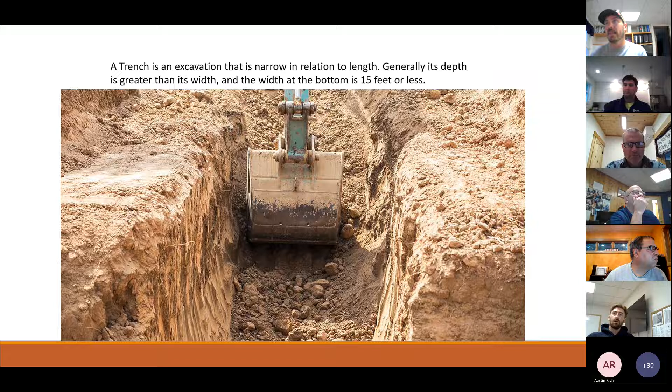Trenches 5 feet or deeper require some sort of system to protect you, whether it's sloping, benching, shoring, or shielding. Sloping is when you slope back the edges of the trench. A good rule is for every foot deep you go, 1.5 feet back. In benching, use the 1-to-1 system, and one bench cannot be higher or longer than 4 feet.

Shoring would be putting plates in and securing them with some sort of jack system or tensioning system that holds those plates against the walls. And shielding would be like a trench box, stuff like that.

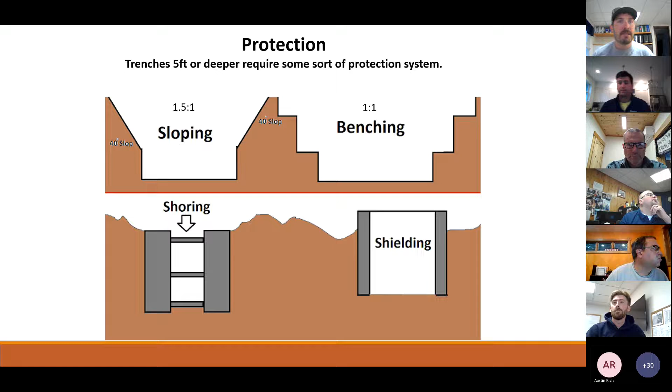You're required to do daily inspections conducted by a competent person, and this person should be able to identify the soil, inspect any protective systems that are in place, design any structural ramps, monitor water removal equipment, and conduct inspections around the site.

You do inspections after a rainstorm, or after freezing and thawing has occurred. So overnight in the spring and fall, if it froze and it's thawing out in the morning, you've got to make sure you inspect that, or when any other conditions arise that you deem necessary to inspect it.

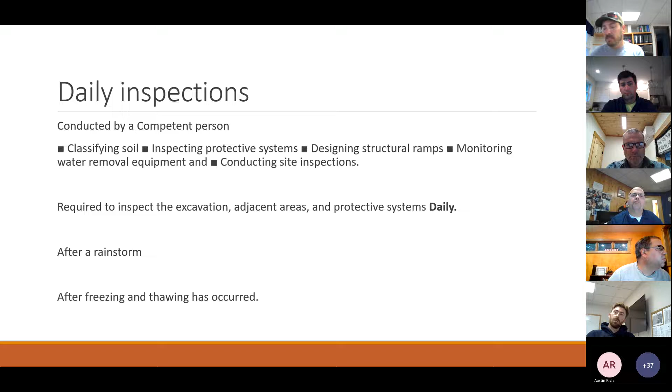What to inspect - again, the soil conditions, any fissures or cracks, and your spoil piles need to be 2 feet from the edge. Make sure any tools or equipment are no closer than 2 feet.

Inspect your protective systems to make sure nothing got messed with overnight. Make sure they're all in good working order. Also check for hazardous atmospheres, because a trench seems like a pretty open area, but lots of gases are heavier than air and can settle in the lowest parts of wherever they traveled to.

You have to have safe means of egress, a ladder within 25 feet of where you're working in the trench. You've got to have a ladder, stairs, steps, or ramps, something other than just a sloped bank out of the trench, because you could roll your ankle or get hurt trying to get out quickly.

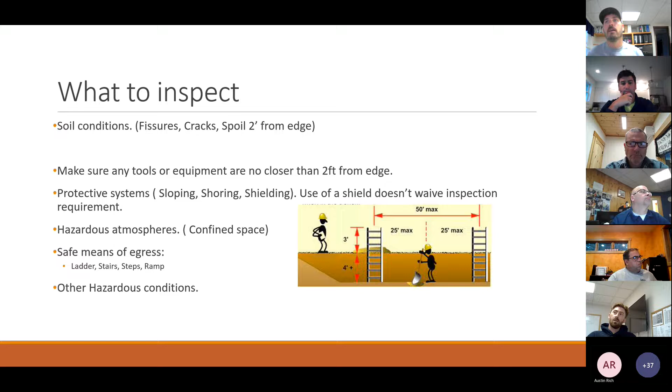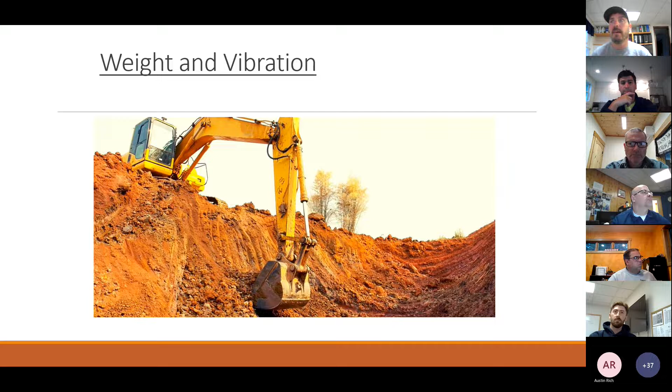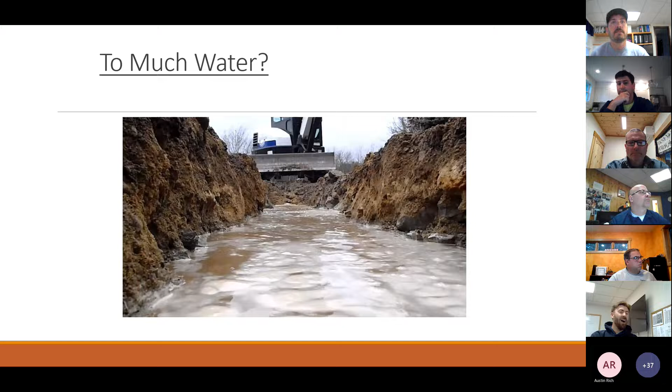Again, be aware of any weight or vibrations on the edge of the trench. They can weaken walls. Too much water in there is a problem, water and trenches and dirt really don't mix well. Water can destabilize the trench quickly. With that weight and all that, be aware of fissuring or bulging of the walls. Any cracks or bulges you see means the trench is becoming unstable and dangerous to work in. So be aware of that. That's all I really have.

So Ken, you're up, or Ethan? Yeah, I'll start. Well, thanks, Austin.

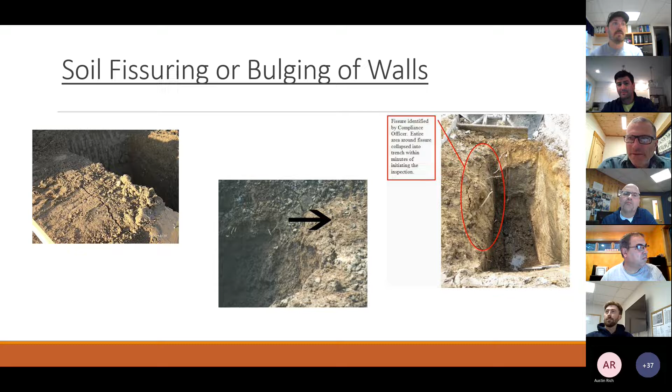I always look for ladders or egress too, and I think that's an important thing that can get overlooked. If an OSHA inspector comes and sees a slope, they might think it's okay, but there's a lot of thinking involved for them to prove it's not compliant. Where if they take a picture and there's no ladder, it's an automatic violation without much effort. So don't let them get you on the easy stuff, is my point.

Trench is a big emphasis program right now, and they are issuing a lot of tickets and stopping to visit a lot of sites. So we've got a lot of open holes out there. Let's make sure that if you have any questions on a trench excavation, you let us know. Let us help you make sure we're in compliance.

I have one thing, Ken, where that photo on the right shows the fissure. We had a guy, a long time ago, who got hurt really bad, and it was only a 3-foot deep trench. You know how we're always trained that you need a trench box at a certain depth. It was up at the U-Mall, and it was heavy soil. It was only a 3-foot trench, and that was happening, the guys had noticed it, but he broke it. His leg got broken by the soil, the way his leg was positioned. So just because it's shallow doesn't mean it's not dangerous when it starts caving in.

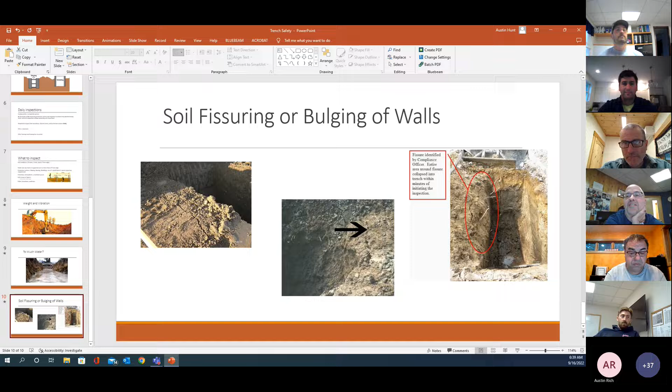It's a lot of weight. Yeah, be a lot of weight. Especially if you've got a boulder or something solid, it's going to stay together as it rolls at you. Yeah, and it goes quick. All right. Thanks. Okay, I'll take over the screen.

Scott Burns is remembering who I was talking about right now, I bet. It wasn't him, but he was here.

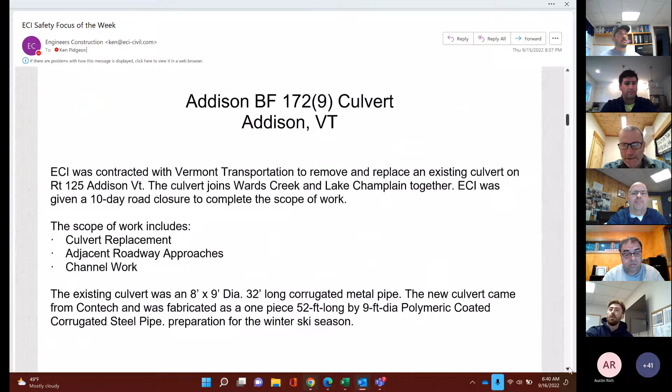This week's project of the week was the Addison BF 172(9) culvert replacement. ECI was contracted with Vermont Transportation to remove and replace an existing culvert on Route 125 in Addison. The culvert joins Wards Creek and Lake Champlain together. ECI was given a 10-day road closure to complete the scope of work, which included culvert replacement, adjacent roadway approaches, and channel work. The existing culvert was an 8-foot by 9-foot diameter, 32-foot long corrugated metal pipe, and the new culvert came from Contech and was fabricated as a one-piece, 52-foot long, 9-foot diameter, polymeric coated corrugated steel pipe.

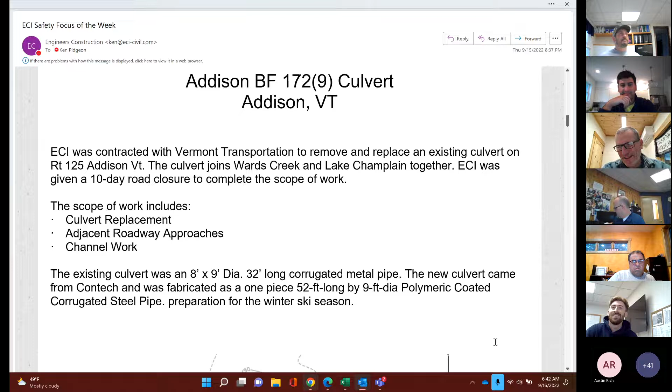I see I somehow got a typo in there, in preparation for the winter ski season. I had a lot of trouble last night pulling all this together, I've had a lot of trouble with Constant Contact, and I made changes that didn't show up here, so I apologize for that. But that's all right, everyone gets the point. I'll scroll down to the photos now.

This first photo shows some existing conditions. You can see Wards Creek flowing right into Lake Champlain.

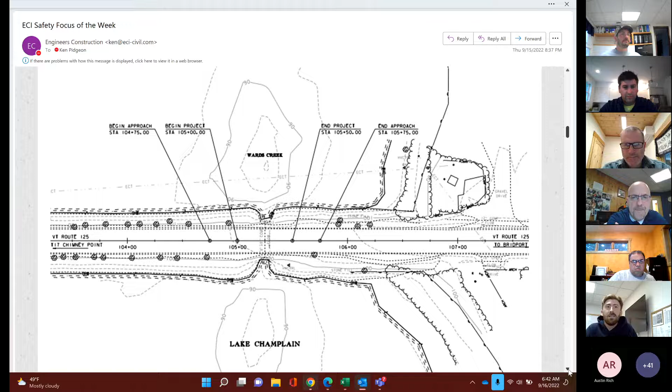Project width, we had 50 feet off center line to complete the work in. And I think that's it for this page.

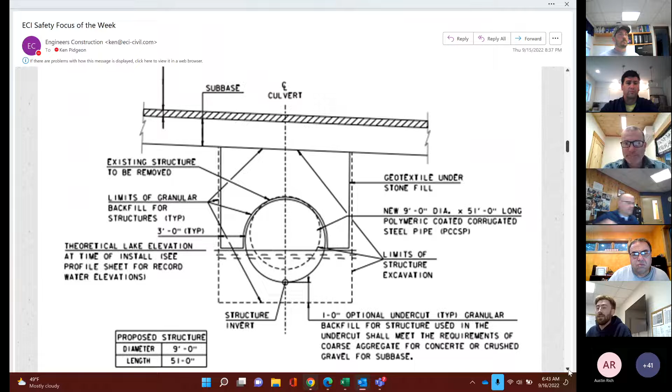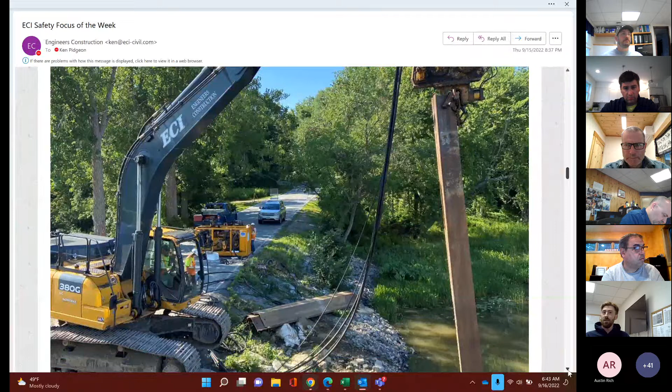The whole project was done with our John Deere 380. This photo shows us driving 25-foot sheets for a cofferdam. We used that on the inlet and outlet, and a 6-inch pump to dewater the project.

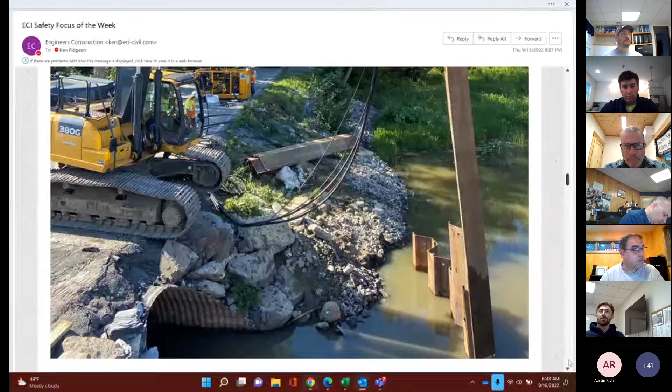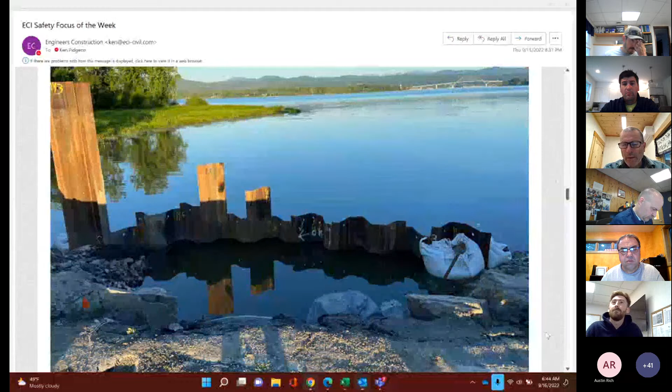That was a cool photo up in the bucket. A lot of mornings were pretty calm and nice there. You can see the bridge in the background, but this just shows the completed cofferdam. I forget the name of that bridge, but it had nice views. Neat bridge, yeah.

Right here you can see the existing conditions of the culvert. It's pretty corroded on the sides and definitely needed to be replaced. It's very similar to the Talcott Road culvert, how it broke down at that point.

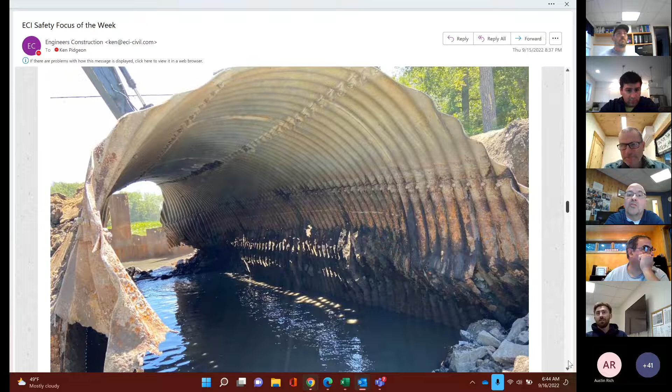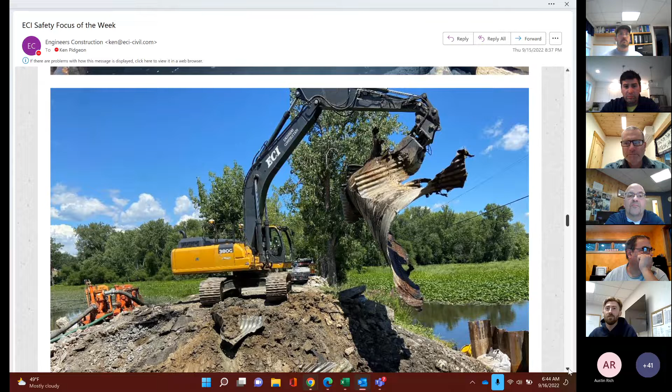Keep scrolling. The middle was all corroded out, so the top peeled off pretty easily, but the bottom was pretty sedimented in with like 3 feet of silt and rock. It definitely took some time digging that out and peeling it out. This is a photo of them peeling off at least the top of the culvert.

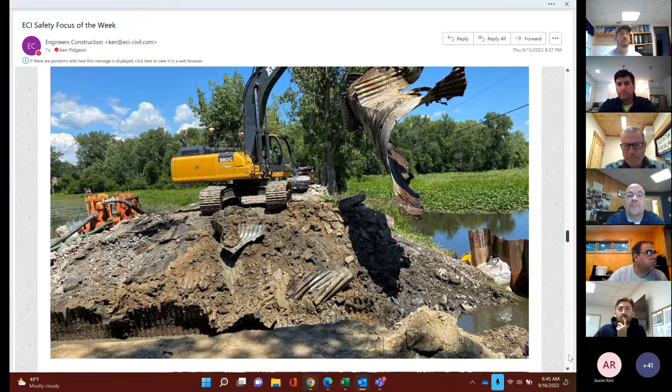This is the new culvert that went in, and we used the loader and excavator to walk it down the road from our staging area. It came as one piece - pretty cool, huh? It was actually Contech's biggest pipe they ever fabricated for one full piece of pipe, transported. So they stopped and saw it.

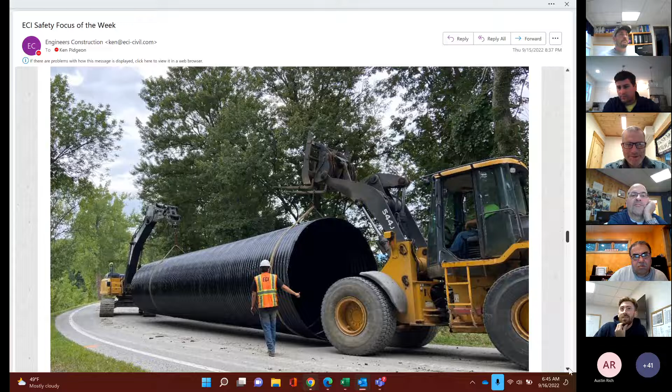They were excited too. It makes the installation a lot faster. Once they got it over, they re-rigged it and set it right into place. It went really smooth.

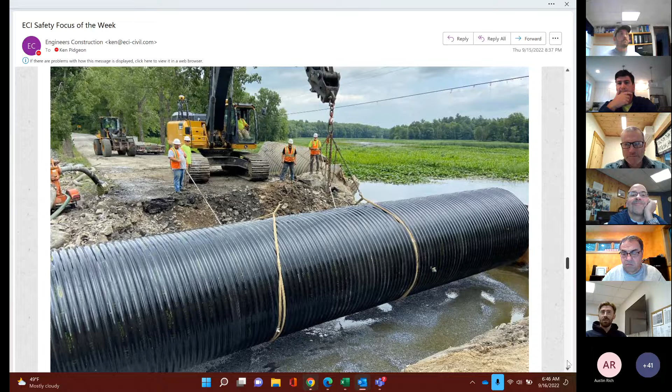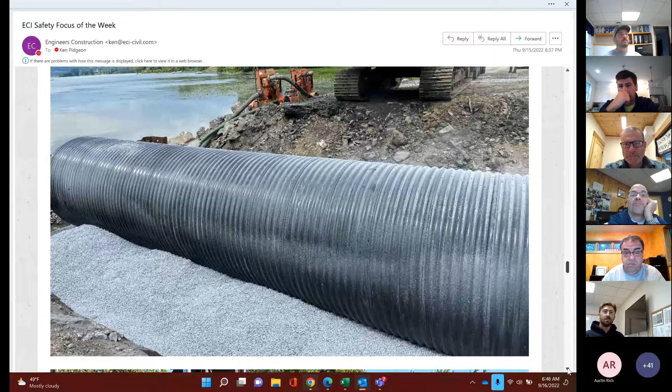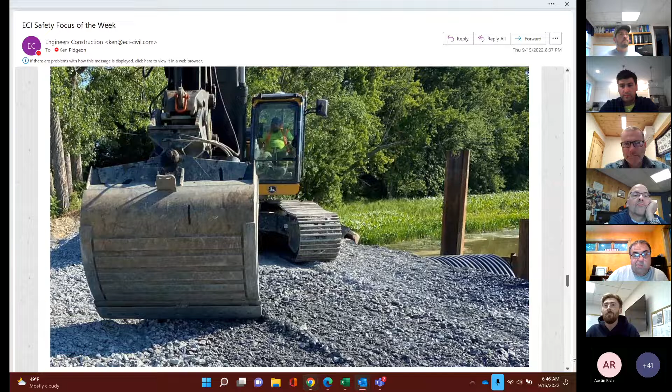Here's a photo of them backfilling, so you can see we're just up out of the water level, and I believe he's started backfilling the other side. That's the 3/4 inch stone. Finally, towards the end, there's Jerry grading off the dense graded crushed stone or crushed gravel for the subgrade. And yeah, we hit our 10-day closure - we used just about all of it.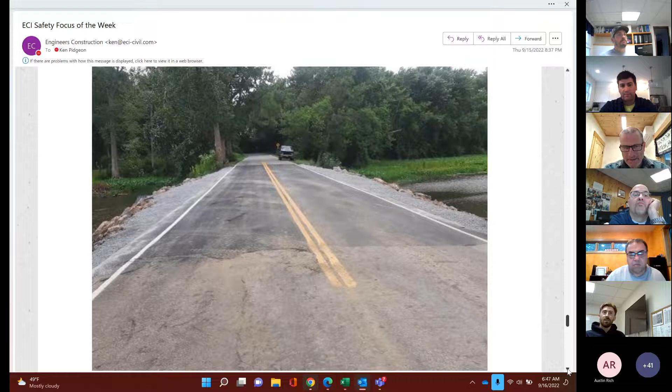This is from the photo archives, the Carey Bay Route 2 culvert replacement in North Hero back in 2012. Obviously it's quite a similar job, tying in two bodies of water, but it's a lake on each side in this case. The other unique thing about Carey Bay is Route 2 here is the only connection across the county - there's no back roads around because it is truly a causeway setup there. So we had, I think in that case, a weekend shutdown to get it done, and those are multi pieces there. It's an interesting job, kind of cool how we get these culvert jobs, and we found ways like the single piece - I think that's really a unique way to speed things up a lot.